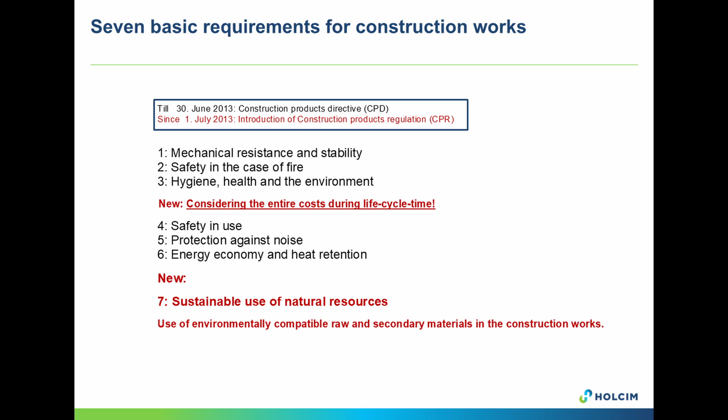I want to show it now - these 7 points are important for us. Before we start this project, we have to think about the arguments. What is important for the future? What is important especially for urban areas when you think about sealing?

Generally, we say areas and roads are parts of our living spaces. Of course, not our living room, but every day we need those roads or those places. This must be sustainable and valuable.

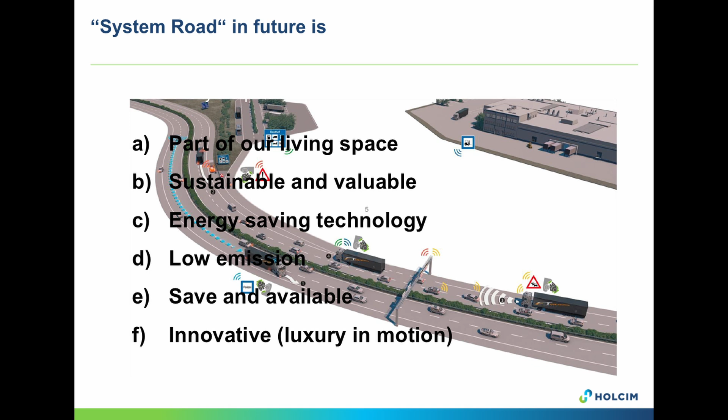The next points are hard facts for us: energy saving, technology, low emissions. These are two factors I want to run through in the next 30 minutes. Safe and available must also be our roads, and maybe some innovative luxury in motion.

One part I want to come back to is energy. We had a project together with the university - without the university it's not possible. We're talking about light-colored concrete surfaces.

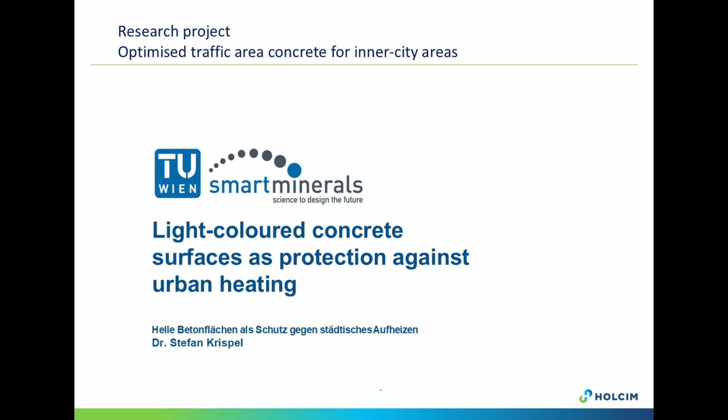When you are busy in road construction, or generally in sealing, the competitor of concrete is asphalt. We are white and the other is black. Maybe there is some difference, not only in stiffness - asphalt is flexible and we are rigid. They are black and we are white.

The main topic, or main impressions, are those so-called heat island effects - nightmares of modern cities. You see here on the left side some impacts, some issues we have to address. Important for us is the increased heat island effect. When you go out in front of the house, you see plenty of concrete.

I would say it is good, it could also be black. What is the difference between black and gray? I will show you now. We perceive it generally - when you go on a white or bright surface, it's not so hot. When you go on a darker surface, it's more hot. So we perceive it, but we don't measure it.

The reason we do this now is to find an evaluation method to see the difference between black and white colors - the effects of why it is more hot or less hot in a city, or especially in a small area. There were a lot of characteristics involved.

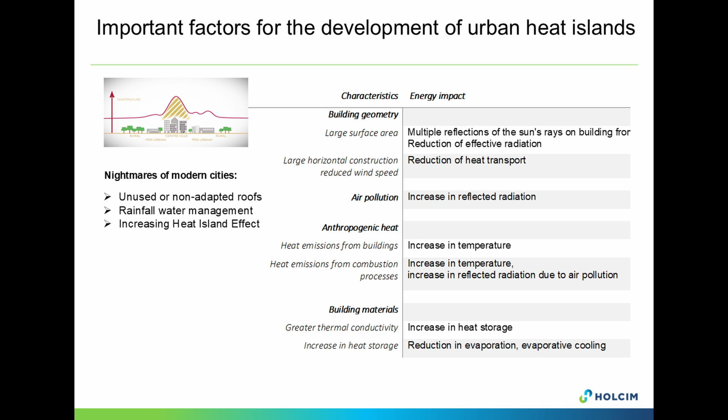It could be the buildings itself, the air pollution, the anthropogenic heat, and the last one are the building materials. That is the special influence we investigated.

Colleagues from the university found out, especially for Vienna where we made the investigation, that the center of Vienna is on average 1.5 degrees higher than the suburb area. That is similar to Ljubljana and other cities. That is only the average. We found also places where it is up to 3.5 degrees higher than outside in a normal urban area.

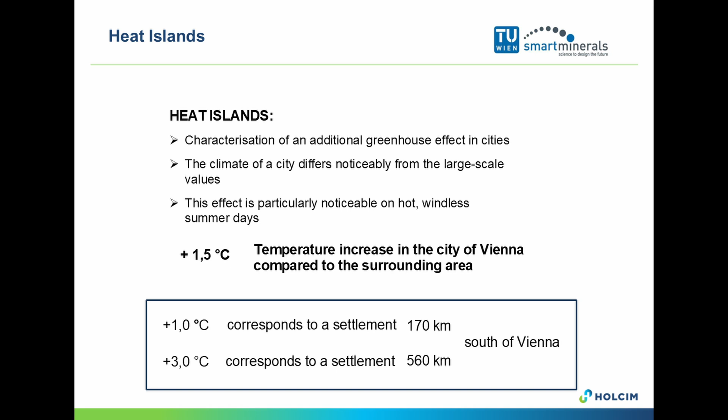What does this mean generally? When you compare it on the planet, when you go south, when you come closer to the equator, it becomes hotter and hotter. So plus 1 degree means about 170 kilometers to the south. So 170 kilometers to the south is nearly similar to the city, to Vienna in between. 3 degrees is about 560 kilometers and so on. This is only to better understand what I mean.

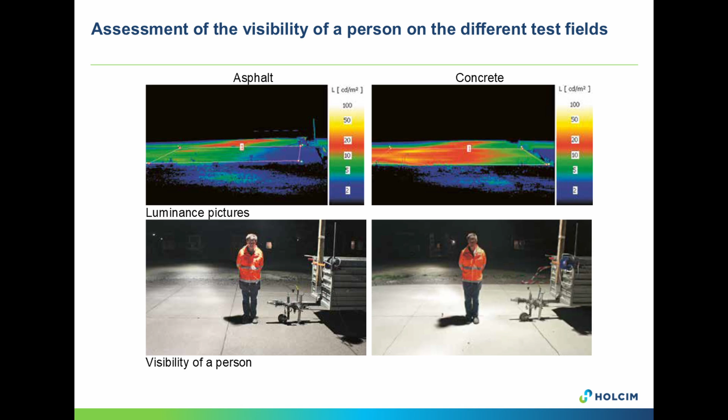So how can we assess the reflection and the heat island effect? We made investigations regarding luminance, you see it on the pictures above. The luminance is the measurement of the reflection, the higher the more reflections you have. Also important, especially at night, is the visibility of people, or when you're on the road in traffic, you see the other cars better.

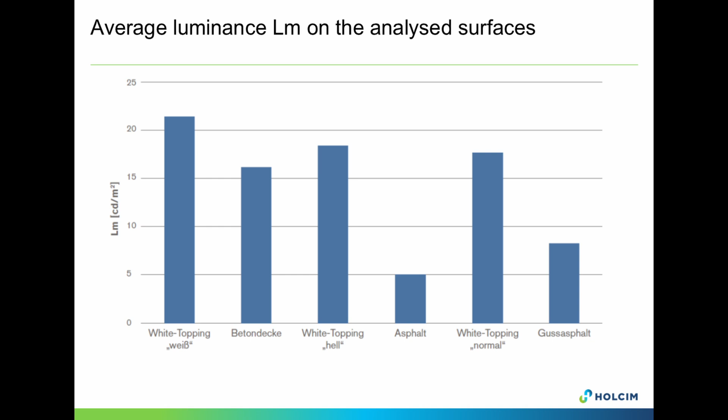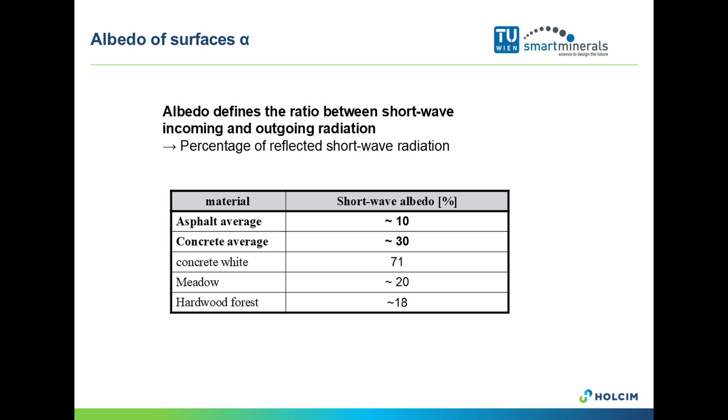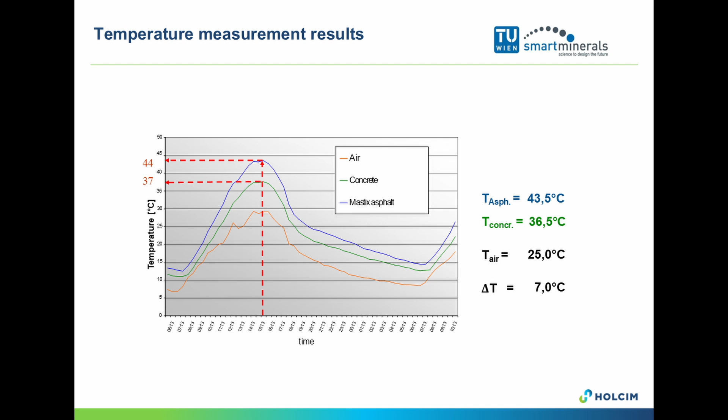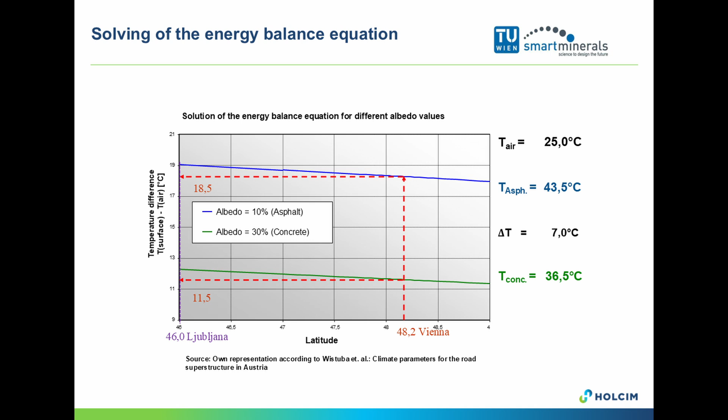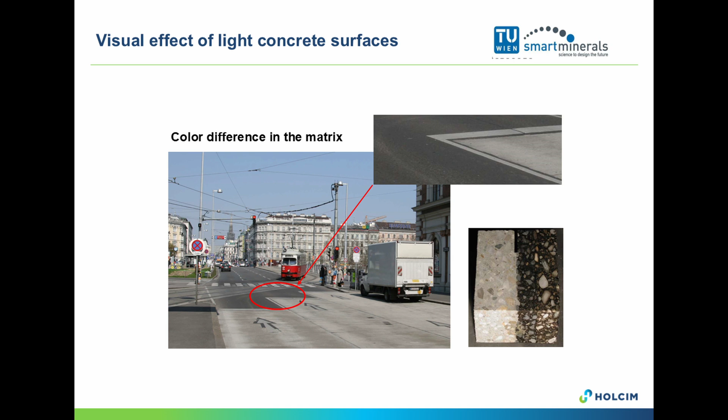The difference between dark and bright area surfaces is about 7 degrees. So the effect is, on one hand, it is now obviously approached and approved: first, the visibility is better with bright colors. Also during operating there are some savings, because bright surfaces need less illumination. You have more reflection, so the heat island effect could be decreased, and that's what we want, especially in future for sustainability.

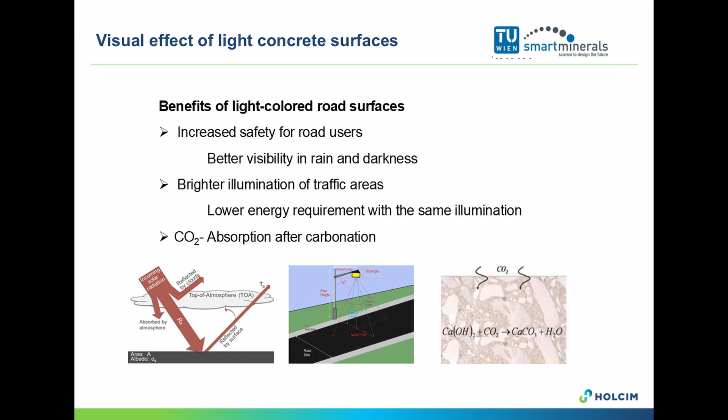Concrete carbonates, so they take carbon and bind it into the concrete. That is still now not allowed, but we are looking for that. Also, we get the permission that we can calculate through our EPD this carbonation factor additionally.

Positive aspects for light colors, to summarize: reduction of surface temperature, cooling energy, reducing the heat in the city. And this is really an important fact. And now my competitors and my colleagues from the asphalt side are shouting very hard against me.

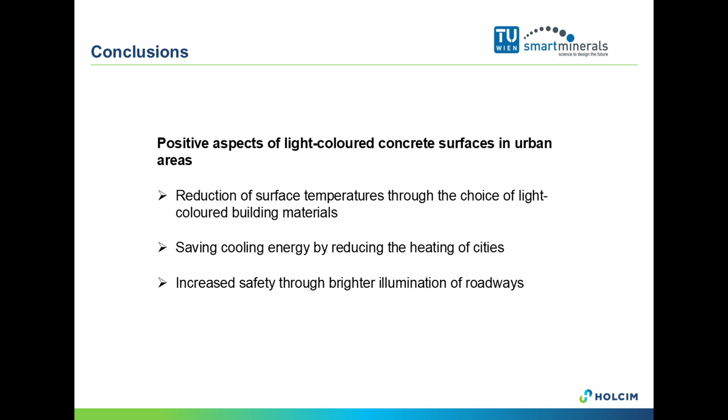Because in Austria, the local governments really demand such areas, because they feel, or the population perceives, that the cities become hotter and hotter. And with such an easy way to reduce the heat increase, without much more cost, it's very easy to reduce such heat island effects. Additionally, the costs during operating, the light effect, is also one big goal that we want to propose for concrete. This is one fact I want to tell you.

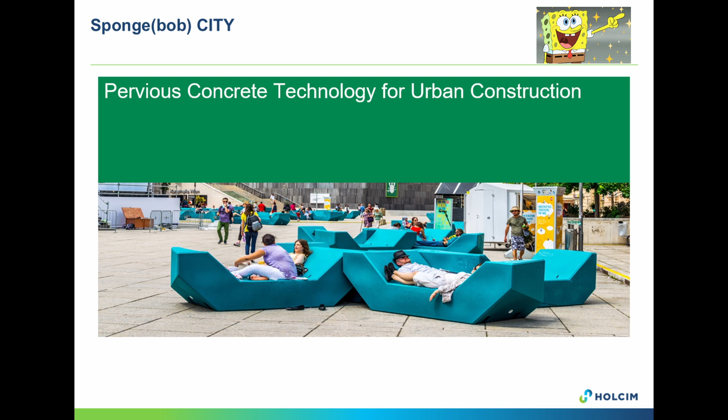The other one is the so-called sponge city, we're looking for sponge city. In the end, you know what I mean: we want to store the rain in the local area. We don't want to bring it to the sewer, so we have to use the rainfall locally. For that, we need sponge concrete, general sponge surfaces.

You see here the advantages. On one hand, it is rain. When you have heavy rain, the sewers maybe are not able to carry the water away. You can store it in the surrounding area. Then you have the possibility to use this water to grow vegetation, for instance trees, and also you can make some aesthetical public areas.

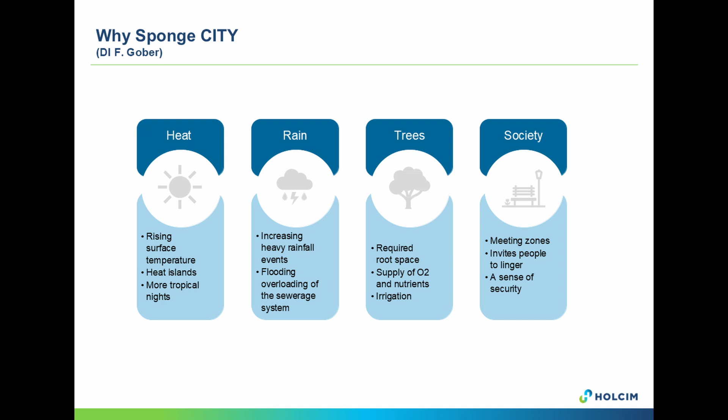The way to proceed is quite easy. You need a top layer that is porous, pervious, permeable. You can do this with paving stones - this is one good opportunity. You can do this with paver grass or with grass pavers, or also with porous concrete or porous asphalt.

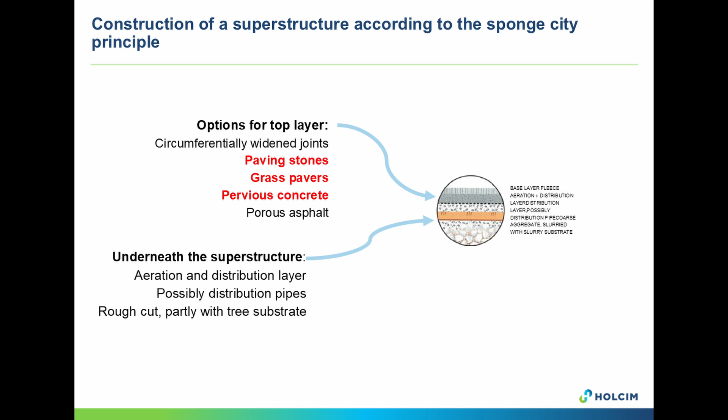And beneath, you need some layers where it is possible to let the roots grow and where it is possible to store the rainwater. In the end, you see it here. That is the idea of what we strive for and what we pursued in Austria.

These are some shining examples for Austrian villages and for also some clients who are convinced about this technology till now. We go on further and further.

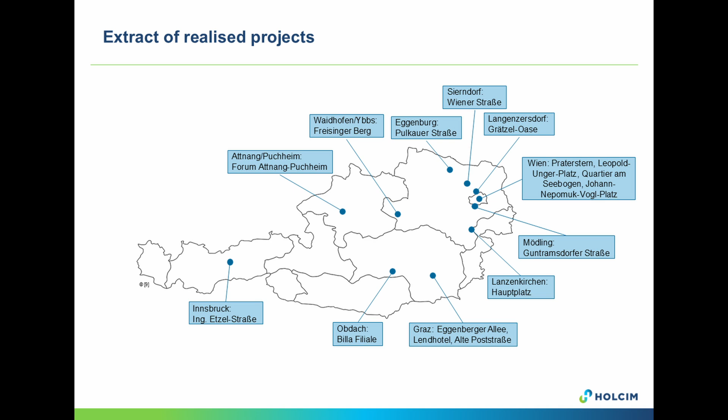Also now the city of Graz is very interested to refurbish new areas and new roads with this new technology, Sponge City - in Austria called Schwammstadt.

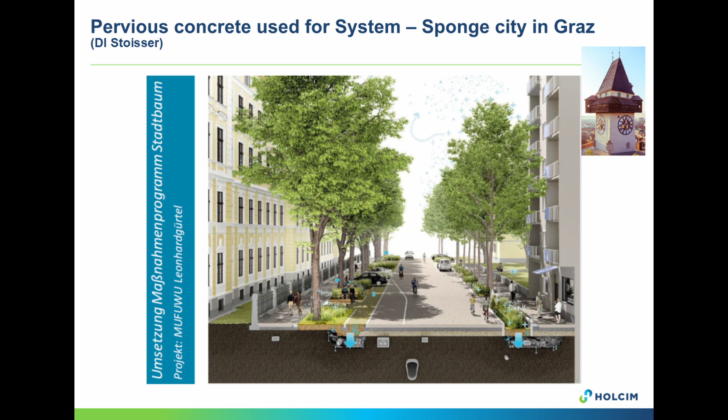You have here the possibility for roads. You have here the vegetation and here the walkways. Here you can use normal paving stones. Maybe you can do it here with paver layered concrete or manually placed concrete. So it's a good opportunity also with bright surfaces, of course. And this is the idea to reduce so-called heat island effects in our cities.

Another example of what we did in the past, a few years ago in Vienna, is Seestadt. You see here the solution was not with concrete, it was the solution with paving stones.

Paving stones generally have the advantage if you have some works to do afterwards. You have to make some earthworks. You can put it easily away, you can place it easily, and you finish this in a really small time.

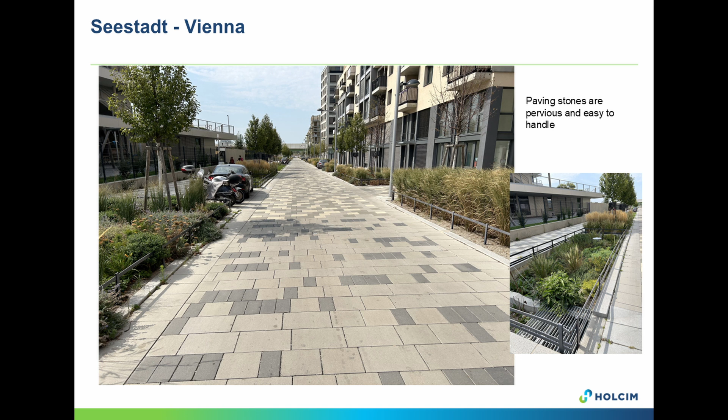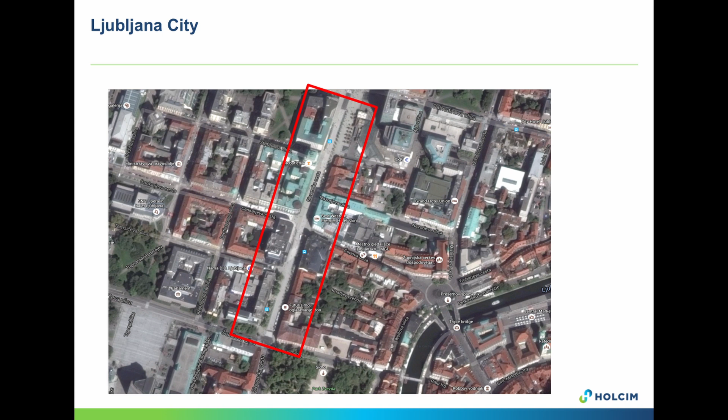Now, Ljubljana is a shining example for such technology. I got these photos from André, who was my colleague 10 years ago when we started with this topic. Also here in Slovenia, I don't know generally if they have the same mindset behind it, but you know this place, Slovenska cesta.

In the middle, you have a concrete road. Here you have the paving stones and the vegetation. That is the right way to reduce heat island effects, to store rainwater locally.

This is the idea of what we have for the future, and that is what we will pursue going forward.

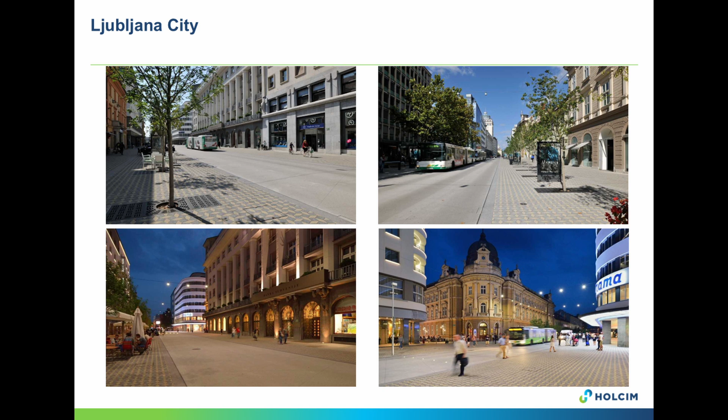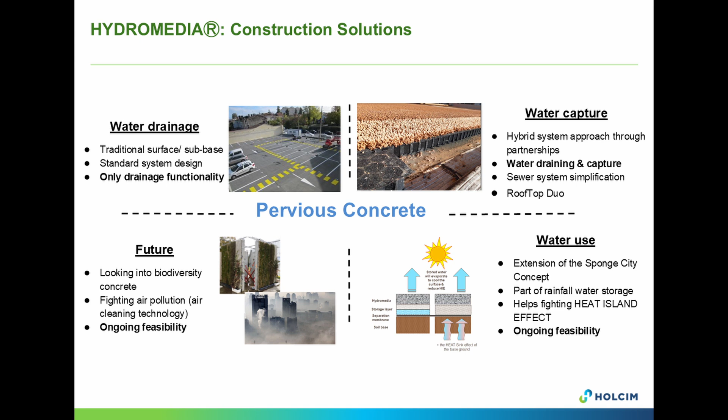Of course, our company also did additional investigations. We invented a special material called Hydromedia. It's nothing else than a pervious concrete. You can use it for different applications, also for the rooftop or for urban places or for heavy traffic - it depends on what you want to do and how to act. You have different requirements for that. In the end, it's nothing else like a pervious concrete.

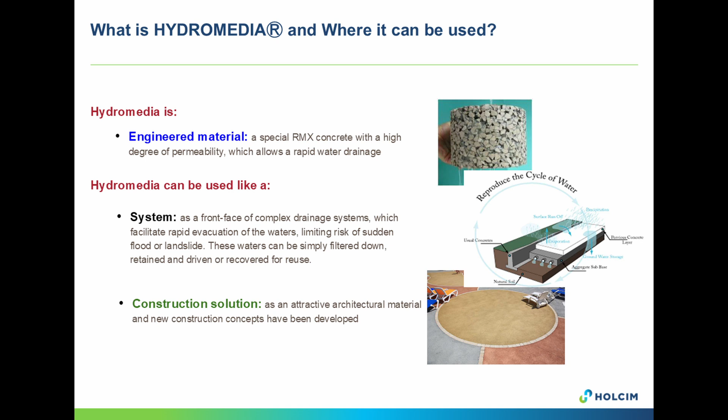The problem is that you lose the small size aggregates, and therefore you may have problems with the tension strength of concrete. To increase the tension strength of the concrete, it's necessary to put some polymers inside, and this is maybe not so sustainable for the future. We will see, but maybe for urban areas it's a good idea to reduce the so-called heat island effects.

What we can offer you, if you're interested, is our own tool to make a special mix design. There's another application where it is maybe a good opportunity to use this pervious concrete - for rail tracks in between to make it drivable, especially for the blue light.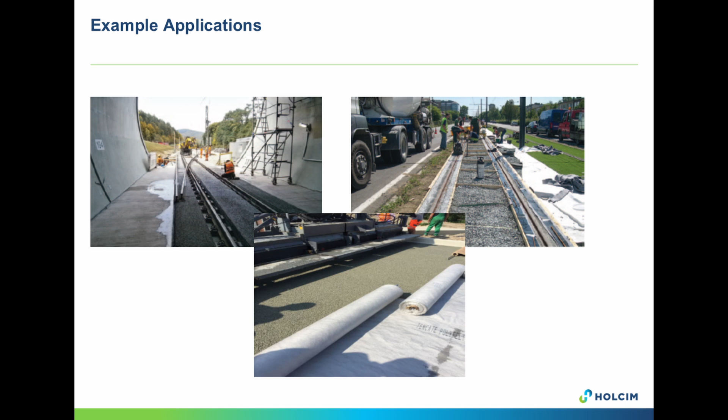An additional advantage when you have a porous concrete is that the sound isolation is better than a hard, smooth surface. The problem is, if you use it for the road, it needs maintenance because dust builds up over the year, the pores clog, and so you need cleaning with a high water pressure jet. This is the one disadvantage, I would say.

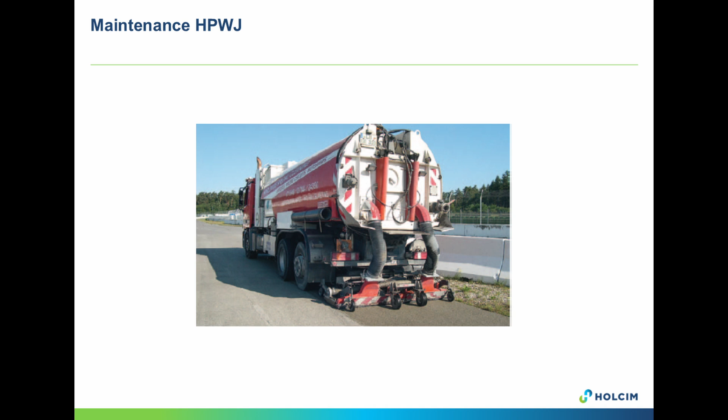Some impressions from Vienna - I also made some tests in our plant close to Mannersdorf on how to place it. You can do it, as I mentioned before, either by paver or, as here, manually. The consistency is not so high, so it's placed in more of a dry consistency.

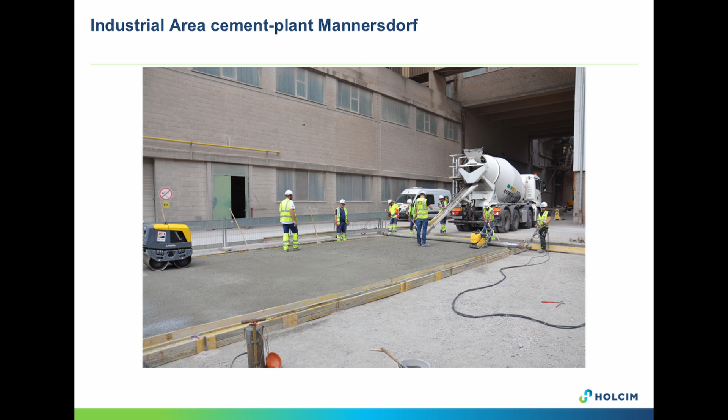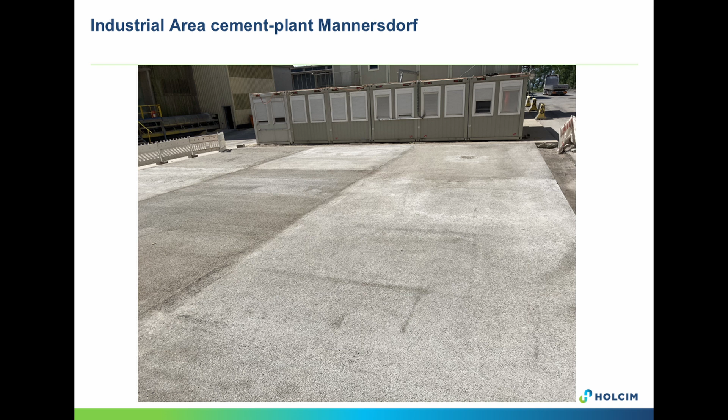And what you see here in cross section is the result of such a top layer of porous concrete. Thank you very much.